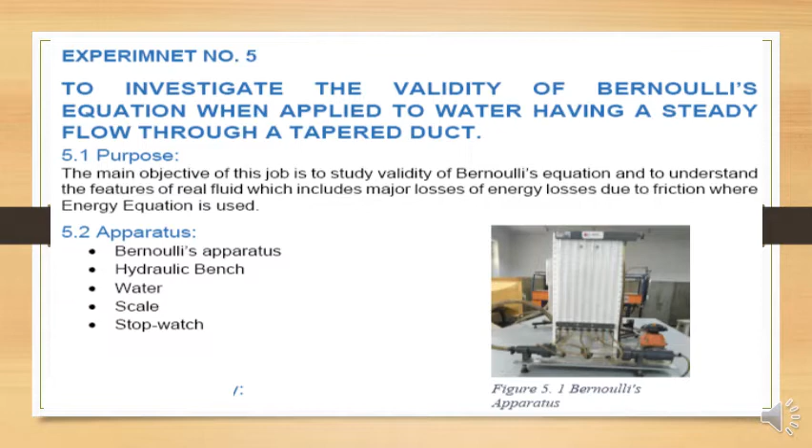So the main objective of this job is to study the validity of Bernoulli's equation and to understand the features of real fluids, which includes major losses of energy due to friction where the energy equation is used. So right now we do not need to calculate the head losses or the energy losses. We are only interested in this practical experiment number 5 to evaluate the validity of the Bernoulli's equation. For that, the apparatus needed is Bernoulli's apparatus, hydraulic bench, water, scale, and stopwatch.

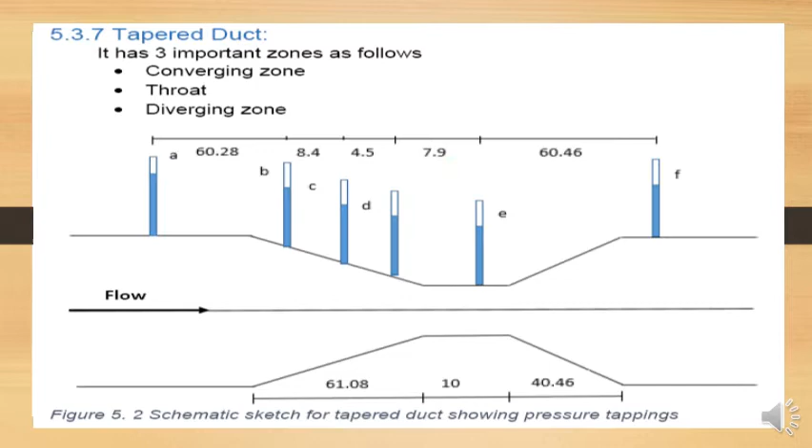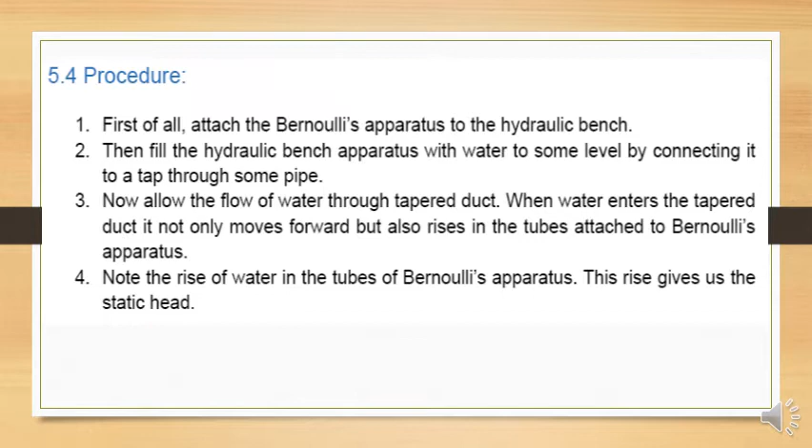Okay, so I have told you that if the known volume of the water is allowed to flow and the time has been noted down, that amount of the water flowing through a certain cross section divided by the given time will be your flow rate. So volume of the water passing through a particular cross section per unit time is called flow rate. So discharge Q has been determined in that particular way.

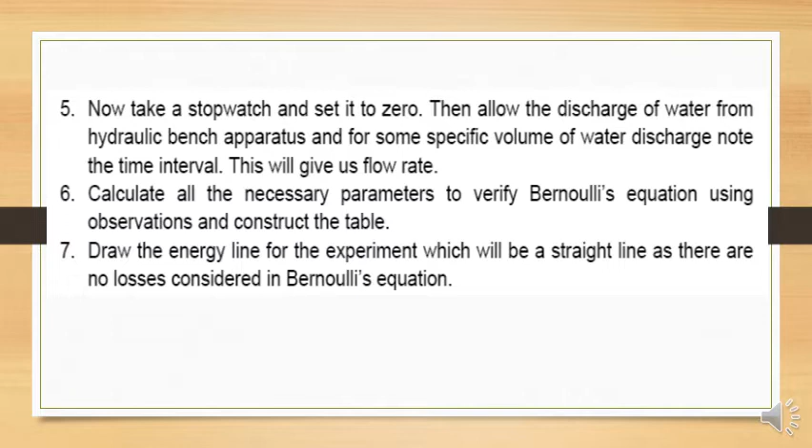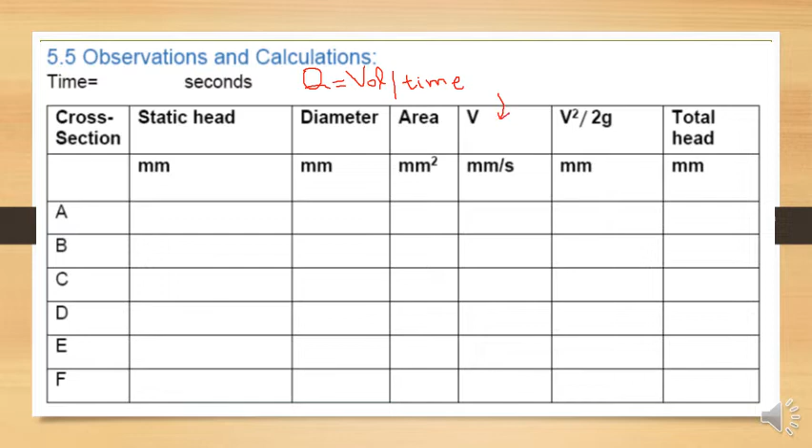Okay, so here you can also write time along with discharge. That discharge will be equal to volume of the water divided by time taken to collect this water. So this will be volume over time. Once the discharge is with you, to calculate the velocity, the formula will be Q is equal to AV. So from here, your V will be equal to Q over A. Discharge is already with you, cross section area you have determined in the calculation table. So you can determine the velocity very easily.

Once velocity is with you, then V squared over 2g can be determined using g constant 9.81, and then the total head can be determined by summing up these two heads, static head plus velocity head. So if this is column number 1, this is column number 2, column number 3, 4, 5, then column number 6 will be equal to column number 1 plus column number 5. So static head plus velocity head.

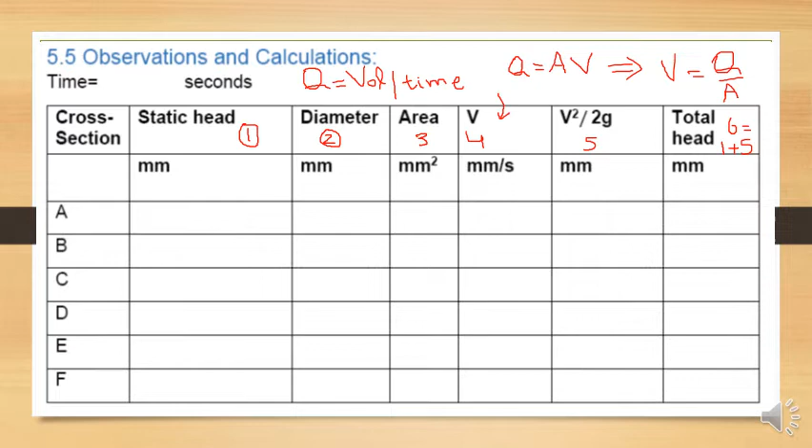So Z, elevation head, will be cancelled out because it is a horizontal duct or pipe. The elevation is the same for all of the cross sections, so it will be cancelled out. So you will be left with total head, that will be column 1 plus column 5. So depending upon your results, you have to write it.

So for the Venturi meter, the coefficient of discharge derivation we have done in the theory. So you can take a reference from there, and also the related theory has been written in the lab manual. You can take reference from there.

So finally you have to have one formula to find out the coefficient of discharge for a Venturi meter, and for that you have to establish the flow that is going to be passed through the Venturi meter, and that is going to be again incorporating the discharge measurement and the related parameters.

You can use the hydraulic bench and stopwatch to get the discharge of the water flowing through the system. The Venturi meter is already installed. So we have only two cross sections for the differential manometer, one on the converging part and one at the throat. And electric supply is needed just to make the flow of the water convenient for that particular experiment.

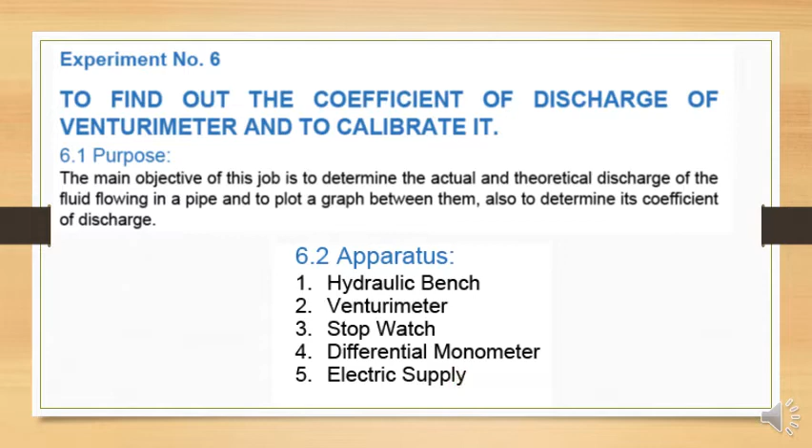In the next slide, you can see the expression of rate of flow for the Venturi meter. Bernoulli's theorem is applied between the inlet section, which has a diameter equal to the pipe, and the throat. The manometer contains two limbs which are calibrated to measure head. Both limbs are connected to the respective points of the pipe. It contains manometric fluid, which is usually mercury, having specific gravity 13.6.

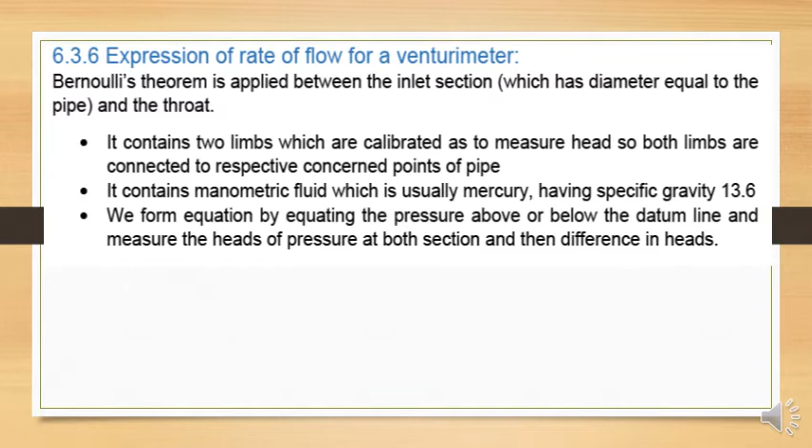We form the equation by equating the pressure above or below the datum line and measure the pressure heads at both sections, and then the difference in the heads can be calculated. Here you can see the figure. This is a schematic diagram for this experimental setup. These pipes are installed with the help of the rubber pipes, the same used in experiment number 5. On the left hand side of the fluid friction apparatus, you can see the manometer attached with the Venturi meter, and you will see it when you come for the performance.

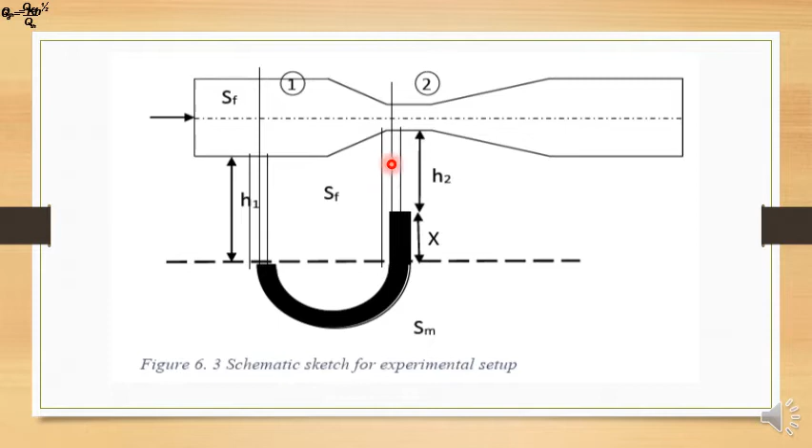So when you make the flow within that Venturi meter, you will see the difference in the rise of the water within the differential manometer. So this H1 and H2 need to be measured during the experiment. The cross section where you get H1 will be at the actual diameter of the pipe, and H2 will be at the throat. In this way you are marking two cross sections for the Venturi meter, and developing Bernoulli's equation to get the coefficient of discharge.

In the next slide, we are not dealing with the details behind the derivation of this Q theoretical. We are just getting this equation directly. For the theory, you can take a reference from the lab manual. So Q theoretical comes out to be equal to A1 A2 square root of 2g divided by the square root of A1 squared minus A2 squared. It will be multiplied with capital H, and capital H will be measured by (gamma m over gamma f minus 1) into capital X. So all of these parameters are known to you.

The actual discharge can be determined with the help of the hydraulic bench. You have already done this practice for experiment number 5. You allow a known volume of water to go through the hydraulic bench and note down the time. So volume divided by time gives you Q actual. Knowing theoretical and actual discharges, the coefficient of discharge can be computed as follows. CD can be determined by taking the ratio of Q actual to Q theoretical.

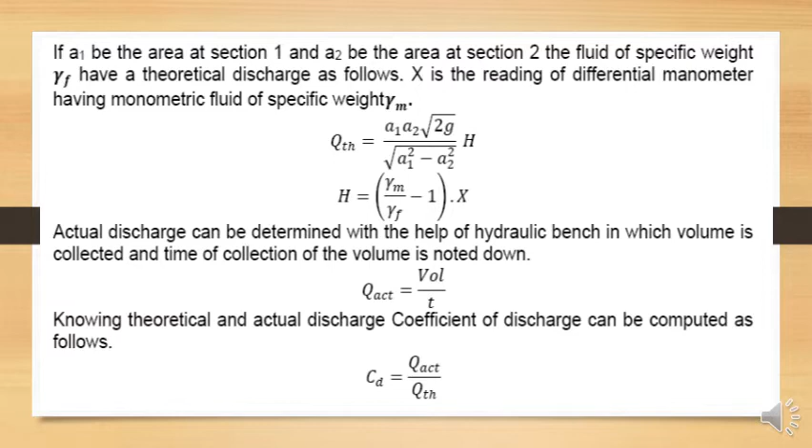Now the procedure. You have to arrange the apparatus, pass the fluid in the Venturi meter to develop the flow, note down values of H1 and H2, note down the volume collected with the help of the hydraulic bench, and also note the time of collection. Compute the actual discharge by volume divided by time, and determine the theoretical discharge using the formula and observations recorded in the last step.

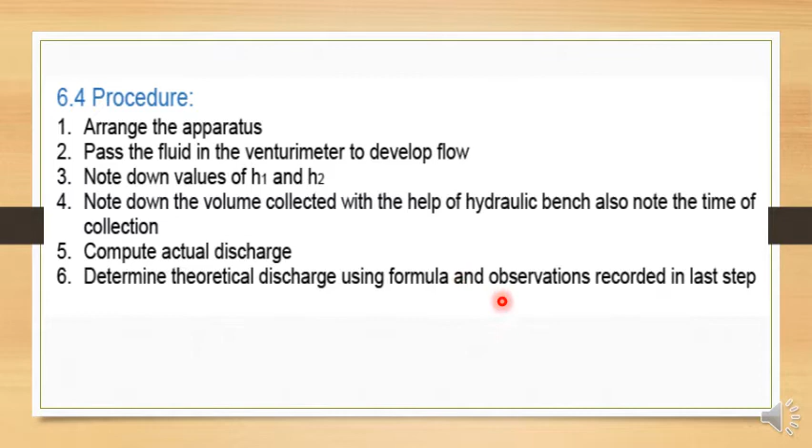So in the next slide, you can see the different values that have been taken during this experiment. You may have D1 and D2 given to you; it will be your known data. When you come for the performance, these values will be given to you and you have to note them down. Using D1 and D2, you can calculate A1 and A2, and input A1 and A2 to get the capital K value. This capital K value is required to determine Q theoretical.

Now coming to the observation table, at least 6 observations you have to take. For that, each manometric reading, capital H1 and capital H2 in both the right and left limbs of the differential manometer, you have to take down, and the difference will be equal to small h. The actual discharge you need to measure by calculating the volume passing through the hydraulic bench or collected in the hydraulic bench, and time of flow. Dividing both of these two columns, you will get Q actual.

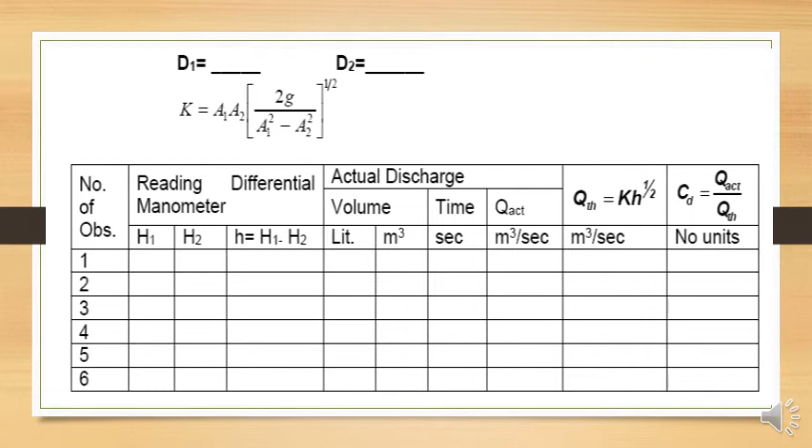Q theoretical by the formula capital K into H, small h to the power of 1 by 2. Just this one, so it is going to give you the answer. Small h is this differential manometer height difference, and capital K is already calculated before entering into the table. Now finally Q theoretical is with you. So once Q actual divided by Q theoretical, you will get the coefficient of discharge. That is the required parameter and main objective of this experiment. So you have to note it down for all of the values and observations, and finally write down the comments.

Now coming to experiment number 7, to determine the hydraulic coefficients Cc, Cv and Cd - coefficient of contraction, coefficient of velocity and coefficient of discharge - for a given orifice. What is the purpose? The main objective of this job is to determine the coefficient of discharge, velocity and coefficient of contraction by calculating discharge through an orifice using orifice and jet apparatus.

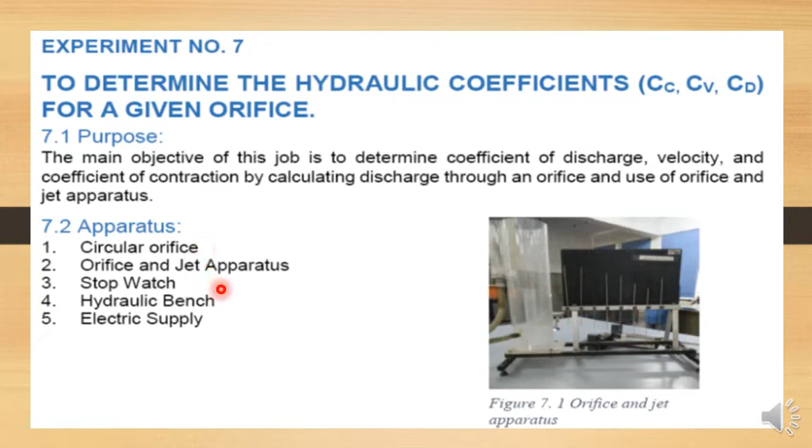So for this particular case, you are using these apparatus, called orifice and jet apparatus. During the layout of the job, you have observed this. Apparatus needed: circular orifice, orifice and jet apparatus, stopwatch, hydraulic bench, and electric supply. To make the water flow easier, you need the hydraulic bench for discharge measurement, and the other apparatus is used to make the orifice practically happen in the lab.

Now what are these three coefficients? In the related theory we have also discussed these coefficients for the orifice, and you can take a reference in the lab manuals. First of all, coefficient of contraction - I am revising these coefficients to make it easy for you guys to understand this particular experiment. It is denoted by Cc, and it is the ratio of area of jet at vena contracta to the area of orifice. Its value ranges from 0.61 to 0.69. Mathematically, it is the ratio of area of jet of water at vena contracta divided by the area of orifice itself.

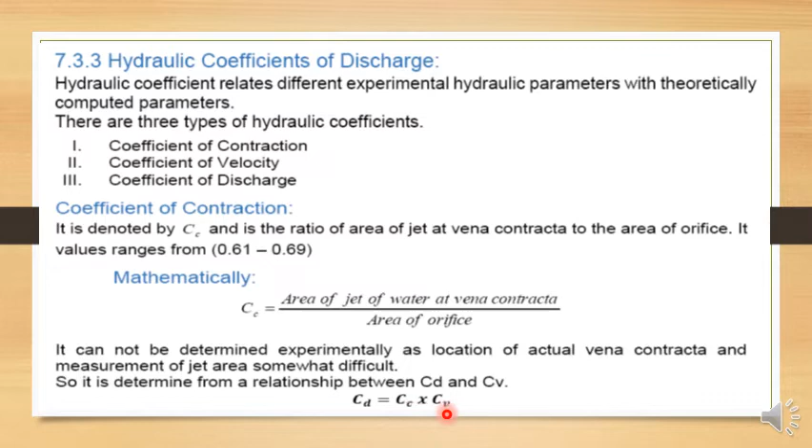It cannot be determined experimentally, as location of the actual vena contracta and measurement of jet area is somewhat difficult. So it is determined from the relationship between CD and CV, as we have discussed in the theoretical part: CD, coefficient of discharge, is equal to coefficient of contraction into coefficient of velocity. So the product of coefficient of contraction and coefficient of velocity is equal to coefficient of discharge for the orifice.

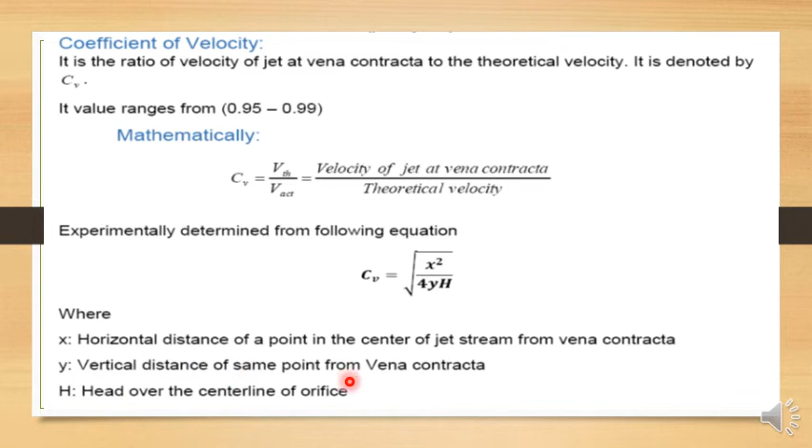Now coefficient of velocity, it is the ratio of V theoretical over V actual. How to determine V actual? It is experimentally determined from the following equation: CV equal to the square root of x squared over 4yH. That derivation of this formula we have discussed in the theory, you can take a reference from there, where x is the horizontal distance of a point in the center of the jet stream from vena contracta, y is the vertical distance of the same point from vena contracta, and capital H is the head over the center line of the orifice.

Finally, coefficient of discharge is actual discharge over theoretical discharge. For theoretical discharge, the formula is already with you, and for the actual discharge, again the hydraulic bench is used to determine it.

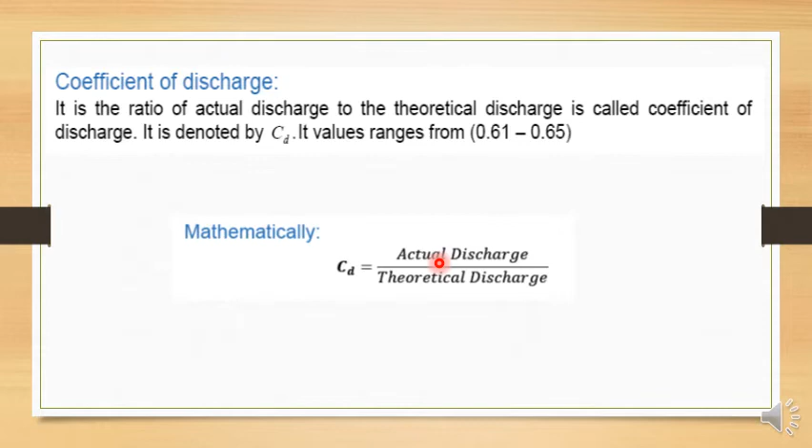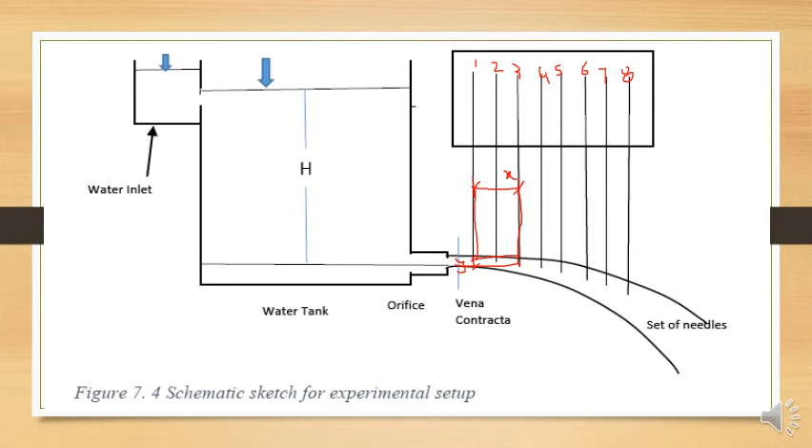So x and y, both these will be with you. You can measure it during the experiment and input it in the formula. The second reading may be considering any other needle, and from the reference mean first needle it will be the second observation for x and y, then any other third one and fourth one. It will be up to you how many observations you are taking and how many needles you are using.

Jet of water: the stream of water that issues out of an orifice is called the jet of water. The jet is exposed to the atmosphere on all the sides.

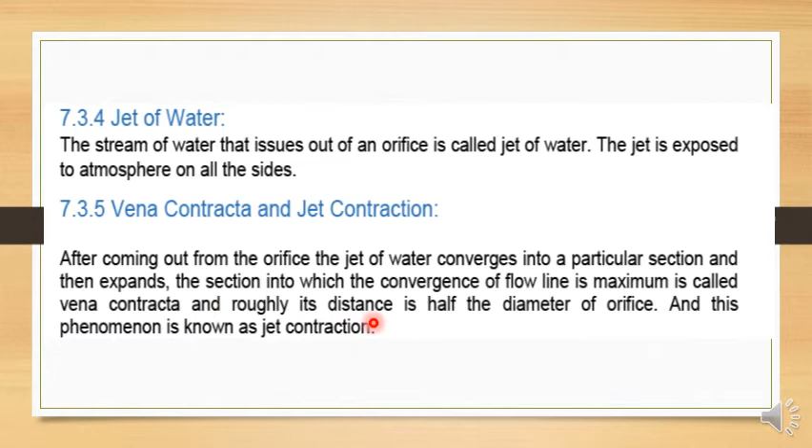Vena contracta and jet contraction. After coming out from the orifice, the jet of water converges to a particular cross section and then expands. The section into which the convergence of the flow line is maximum is called vena contracta, and roughly its distance is half the diameter of the orifice. This phenomenon is known as jet contraction.

Now the procedure. I have told you briefly, now precisely you can do the procedure. Number 1: set the orifice and jet apparatus to the hydraulic bench. This is very important because actual discharge needs to be measured. Number 2: determine the diameter of orifice as capital D.

Number 3: connect the inlet of water into the apparatus. Number 4: let the flow develop through the orifice. Number 5: take measurement of head, capital H, above the center line of the orifice from the scale pasted on the tank. How will you measure H? It can be measured by using the scale pasted on the tank itself. You will see during the performance that the scale is there on the tank, and from that scale you can measure this capital H.

Number 6: set one of the needles to the center line of the jet stream. It's very important, so be very careful while doing this step, that the needles should be exactly at the center line of the jet stream.

Number 7: take readings of horizontal distance from the face of the orifice and vertical distance to the tip of the needle from the center of the orifice, for any needle that you have been considering.

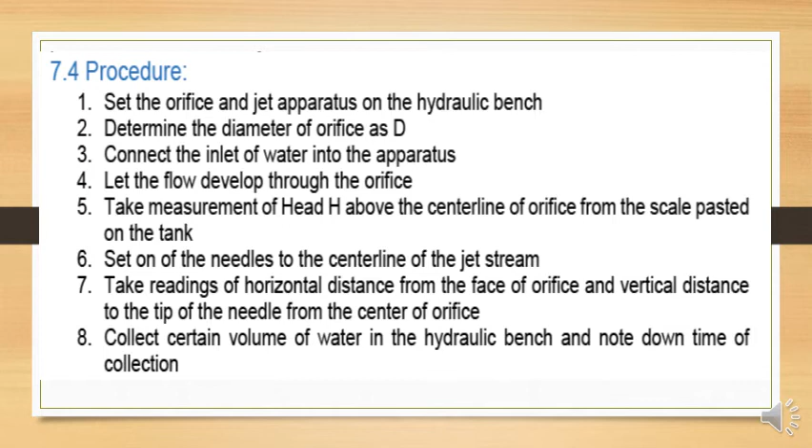Number 8: collect a certain volume of water in the hydraulic bench and note down the time of collection to get the actual discharge. So finally, volume collected and time noted.

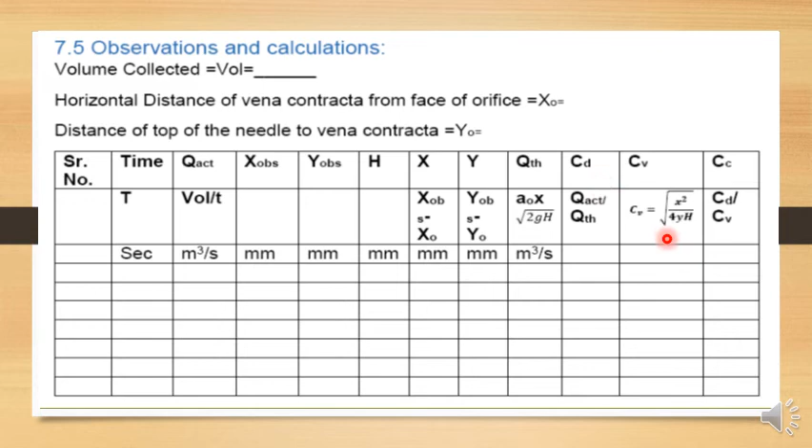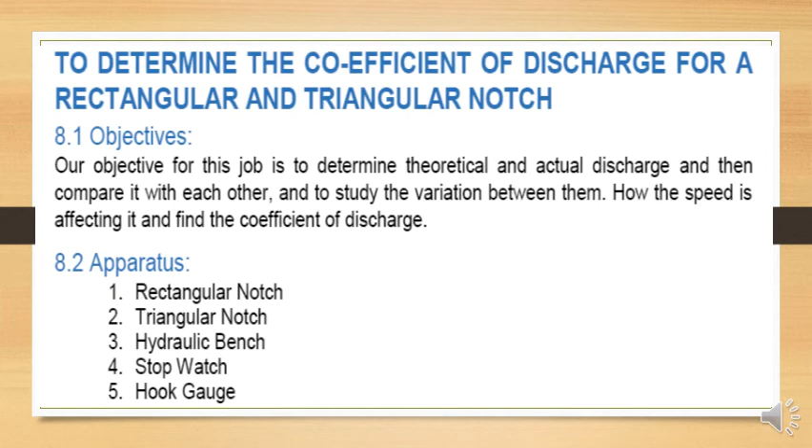So your apparatus are rectangular notch and triangular notch. Those notches are going to be inserted within the hydraulic bench to make the flow pass through these notches. Hydraulic bench, stopwatch, and hook gauges are used to measure the heads over the notches.

So for the discharge relationship, it has been discussed briefly over here. In detail, I have told you that, and you have to take a reference from the theory lectures. Here you have Q theoretical, that is equal to 2/3 of capital L into 2g whole square root into H to the power 3/2

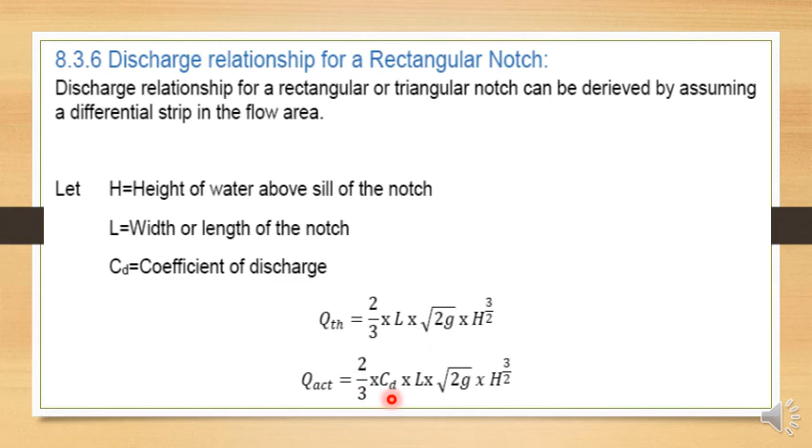by 2, power 3 by 2. And Q actual will be Q theoretical multiplied with CD, that is coefficient of discharge. Rest of the formula will remain the same.

For discharge through the triangular notch, again the formula has already been derived. This is 8 by 15 into tan theta by 2 into 2G whole square root, into H raised to power 5 by 2. For actual discharge, you just multiply it with CD.

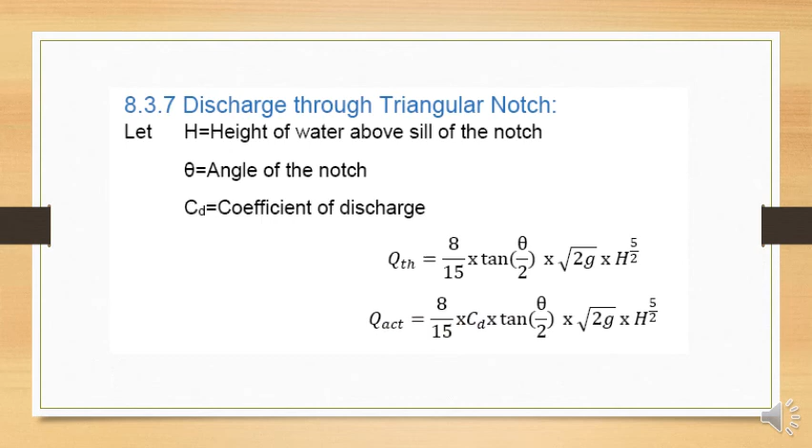Now the procedure is given in the next slide. You need to set the triangular or rectangular notch over the hydraulic bench, as I have told you, and you will see that while performing your experiment. How to do that? Let the flow develop through the notch inside the hydraulic bench.

Block the outlet of the hydraulic bench and start collecting volume of the water. Note down the time of collection of water in the bench. Then note down the value of head at a distance from the notch using hook gauges. How to get that capital H, you will also see that during the performance of your experiment.

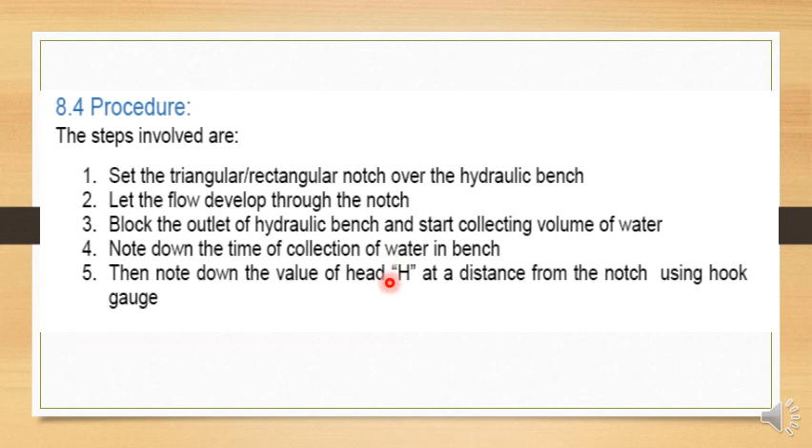Okay, so keep in mind that during the performance this will be your observation. You have to get this head by using, or you can measure it by using, hook gauges.

Gauge reading for capital H will be in millimeters, you have to convert it to meters for each reading. Volume collected will be in liters, you have to convert it to meter cube. Time you have to note down by using the stopwatch. Q actual you can measure by dividing volume by time.

Q theoretical by using the formula, then CD is obtained by dividing actual values accordingly. CD will be equal to Q actual over Q theoretical. So the formula will give you Q theoretical, and volume over time gives you Q actual experimentally. In that particular way, CD will be known to you.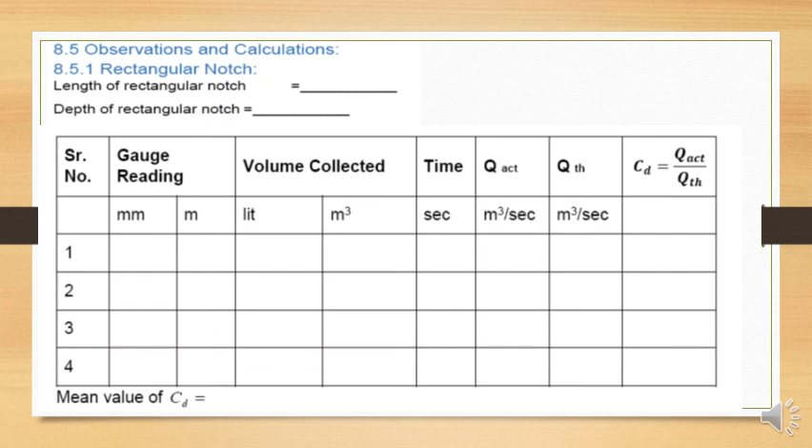So the mean value of CD for all of the values you have to input over here. That first table will be for the rectangular notch. A similar kind of table you have to do for the triangular notch.

For that, the only input data regarding size or dimension parameters will be the angle of the notch, theta. That will be given to you.

Gauge reading by using hook gauges, volume collected by using the hydraulic bench, time by using the stopwatch, Q actual by dividing volume by time, Q theoretical by using the formula for calculating Q theoretical for the triangular notch, CD by taking the ratio of Q actual to Q theoretical. Finally, the mean value of CD you have to report.

In that particular way, you will be finalized with the 4 experiments, and you have to perform them in the next week. Okay, so this is it for today, guys.